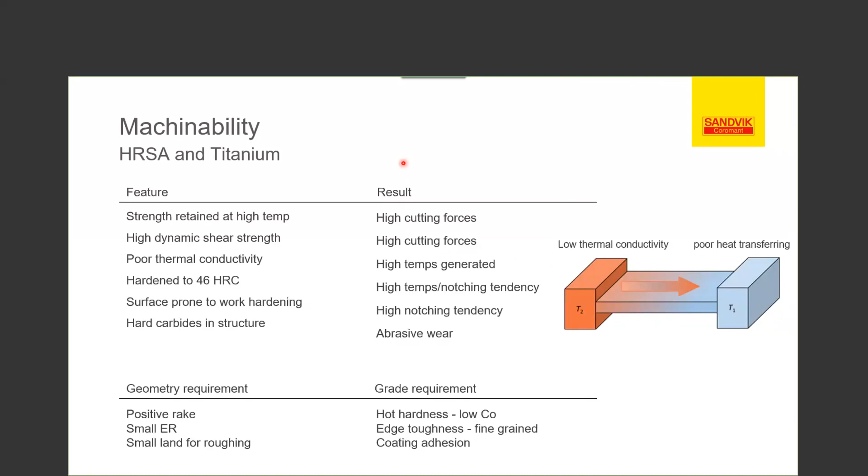The other thing we need to look at is the effects of hardness. What are those materials' hardness levels? Are they annealed, solution treated, or aged? Softer materials typically require tougher grades, whereas harder materials will require more wear-resistant grades, and you'll get more heat buildup requiring those grades.

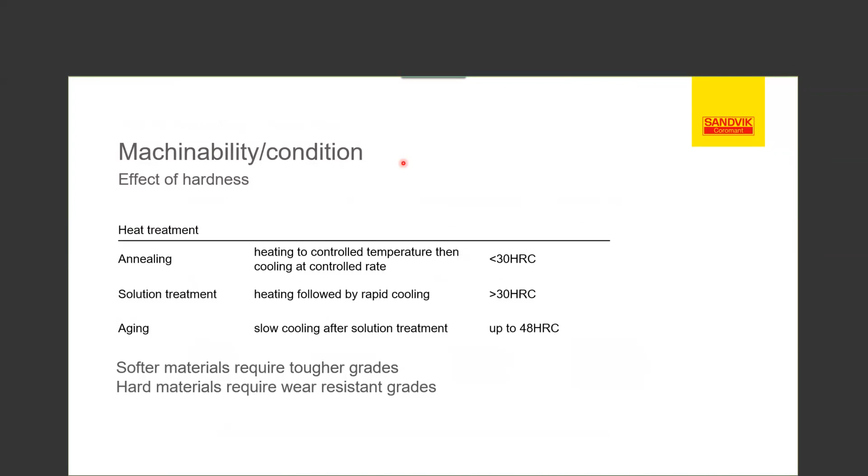When looking at the hardness of these materials, you need to take that into consideration as well, along with the different processes it goes through. For instance, if you take a piece of 718 that's annealed, basically the stress to create a chip is going to be about 900 megapascals. Whereas if you have 718 that's age hardened, same material, just different treatment, you're going to be upwards of about 1350 megapascals. That's about a 40% increase.

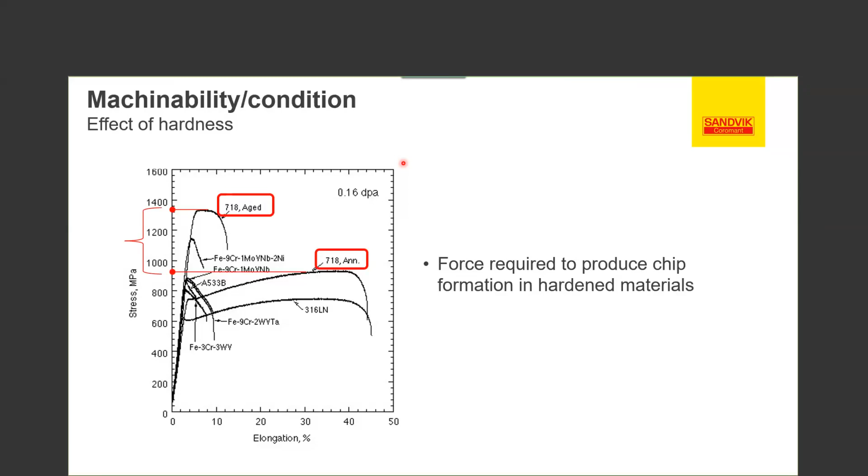So what does that mean? You're going to have to approach this material slightly differently - different techniques, different grades, different types of geometries.

When you look at the different HRSA materials, there's quite a variety out there. The focus we'll talk about today is mainly nickel-based, but keep in mind there's also iron-based and cobalt-based. Iron-based is a little bit heavier, has an iron base along with nickel, and you'll typically see them on shaft-type materials. You're starting to see a little more of the cobalt base, but cobalt is typically seen more in the medical field. So we're going to focus a bit more today on the nickel-based materials.

The most common nickel-based is 718 Inconel. We also see Waspaloy, Rene 41, and more proprietary materials like RR1000, PRM48, and ME16 type materials. Special needs are looked at when we need to machine these materials, which we'll talk about.

The next area is the titanium group. Titanium is typically about 60% the density of steel, very light, with excellent corrosion resistance. They're formed in two different areas, the alpha and beta stages, which we'll talk about. The most common one we see in the industry today is 6Al4V, and we'll base a lot of what we talk about today on that material.

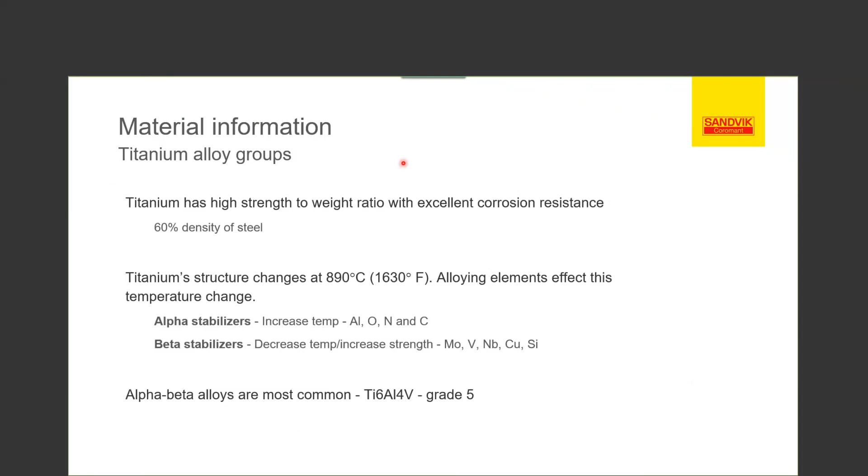When we look at the different structures, we have the alpha crystal stage, typically a lower density, lower strength material, higher creep resistance, and a bit better machinability. Then you get the beta stage: higher density, higher strength, lower creep strength, poorer machinability. And then you have the mix of the two - the alpha-beta mix, where your titanium 6Al4V sits, the very common titanium that's in the industry today.

When you look at the various types of titanium - alpha, beta, and alpha-beta mixes - you can see the speed factors to the left on the chart. The most common one, as I mentioned, is titanium 6Al4V, which I just highlighted. We like to use that as a speed factor of about 1.

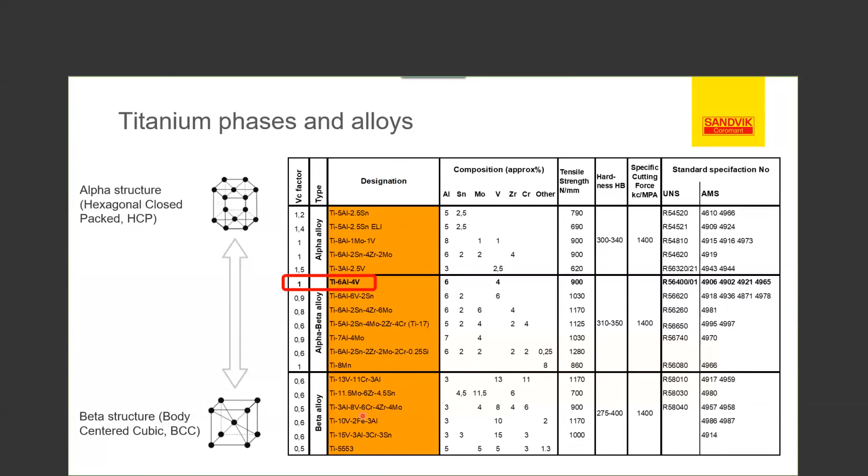What I mean by speed factor is the cutting speeds we use to machine these types of materials, whether turning, milling, or drilling. As materials go further down to the beta alloys, we need to decrease our speed. So if you're looking at a material more in line with 5553 or 1023, which is more common in structural landing gear type materials, we want to reduce our speeds. All of this is driven by the different alloying factors and crystal structures that develop in these materials.

Now that we've talked about the different materials we're looking at, next I want to talk about the process. Proper planning of your processes is important. When you're looking at a component, you want to start by analyzing the features. We don't want to go right into picking speeds, feeds, grades, and geometries. We want to look at our features, put an analysis together, and find out how we want to approach that. Put a machining strategy together, then get into picking your right cutter selection, then cutting data, and then your programming techniques. We don't want to jump right into programming techniques and speeds, feeds, and grades. You wind up creating challenges for you in the long run.

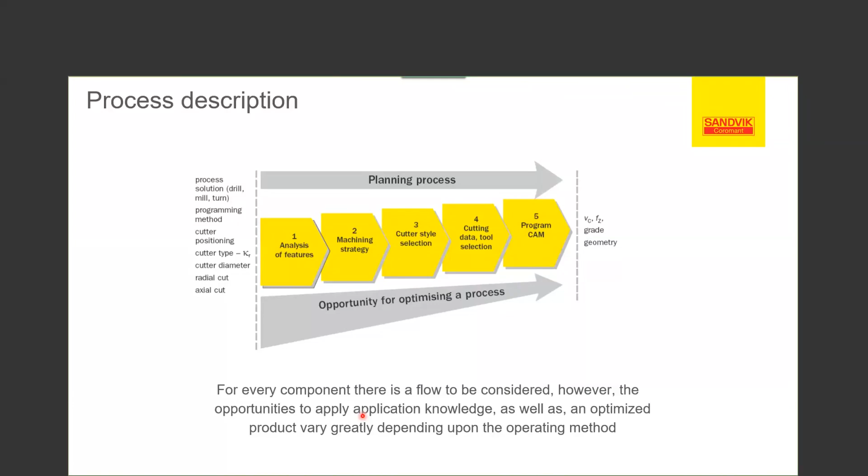It's understandable in the aerospace industry that with existing production, it's sometimes a challenge to make changes, because it's a locked process, so it's very difficult to make changes there. Then you have your partly open process, where maybe you're investing in a new machine and have an opportunity to make some changes inside the production. And of course, then you have your new production, where you're free to do pretty much what you need to do during the production phase. So find out where you are in the production phase, and then see what changes you can make and the different things you can apply as we talk today.

So typical challenges we're going to see, some of these we've already mentioned, are forged and cast skins. We're going to talk about techniques we could use to get around those. Chip control: many of these materials have challenges in breaking chip, primarily in turning and drilling applications. Chip evacuation: when you're creating pockets or deep cavities, removing chips out of there is sometimes a challenge. Short tool life: dealing with these materials, you're not going to get the tool life you typically see in machining aluminum, steels, and cast irons. So a lot of techniques need to be applied to address that for more process security.

Secure process: we're dealing with very expensive forgings and castings, so we want to have proper security when machining these components. Close tolerances and surface integrity: many times in these critical components, we need to be very careful with the tolerancing and surface integrity on these different materials. We don't want to get any work hardening. We don't want any micro cracking. We don't want any white layer inside these components. So different techniques need to be applied to help compensate for that.

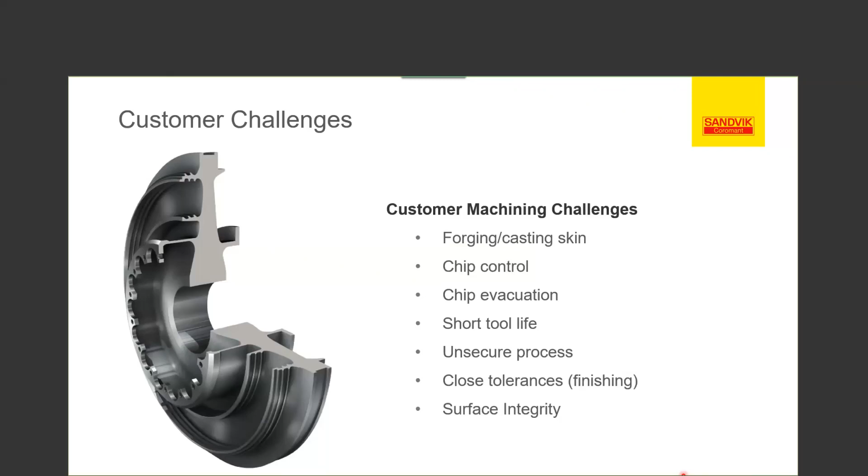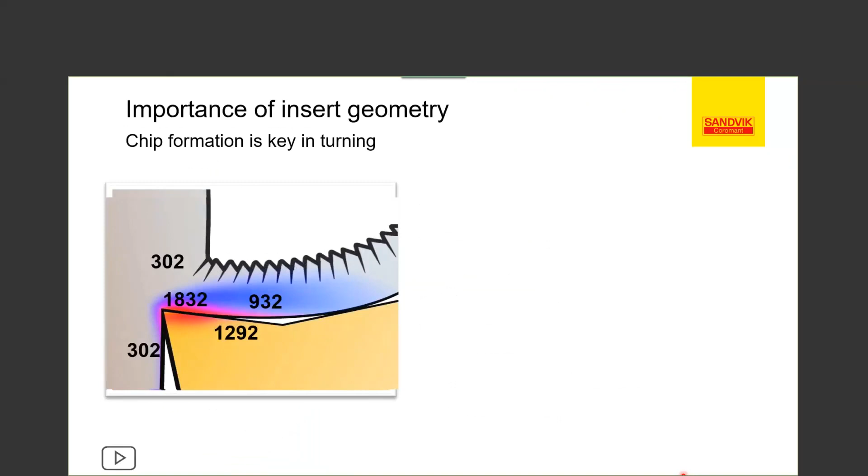Chip formation is one of the most important things when it comes to machining, particularly in turning applications. Typically in turning, when we're creating the chip, the heat goes into the chip. The challenge we have when dealing with these aerospace materials is the heat doesn't necessarily go into the chip. They are heat resistant materials, designed to resist heat. So what happens is that 80% of the heat that typically goes into our chips - if you take a piece of 4140, for instance, and you're machining it, when the chip comes off, it actually turns a blue color, because the heat is being carried away inside the chip. In these aerospace materials, that is not the case. The heat actually is increased, and about 80% of that goes into our inserts, which creates challenges.

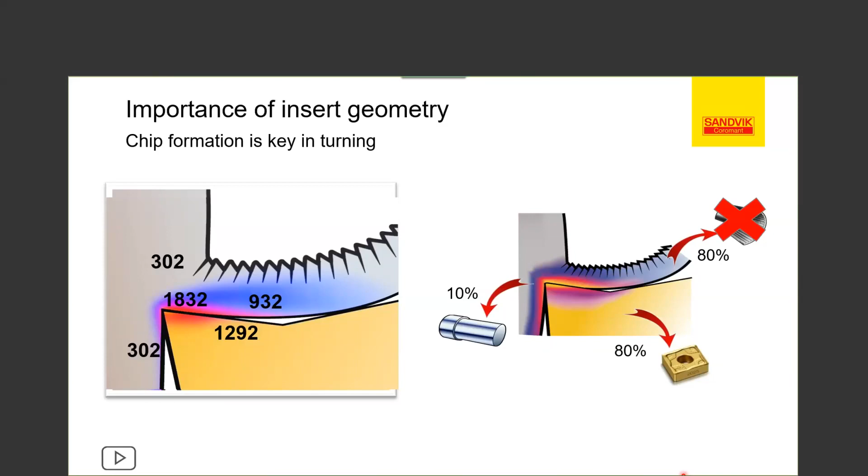What happens when you build up heat? You're going to have specialized tool wear, which we'll talk about. You could create stresses in the materials. You can create white layer. You can create work hardening of those materials. You can create micro cracking in those materials. So we want to be mindful of that. Again, sharper is better.

Again, look at this picture up top here, looking at the sharper geometry. Sometimes we can get away with using positive geometry, but sometimes we still need to use a negative geometry. Be sure we're using something that has a sharper tendency or a periphery ground. They will perform much better in these types of materials.

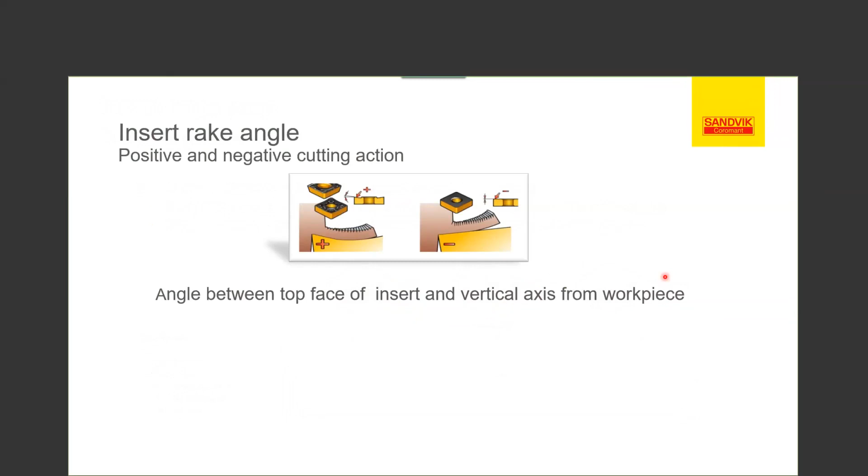If you can see from the illustration here, when we're pushing that chip, we're getting a nice shear, as opposed to when we're using a negative insert, it's actually plowing that material. Again, in this area here, on the negative insert, you're given the opportunity to create heat, which is something we do not want to do in heat resistant materials.

Again, the heat will go back into your chip. Actually, it does not go back to your chip. It goes into your insert and will create a great amount of challenges for you on your component and/or your insert, which will affect your process security.

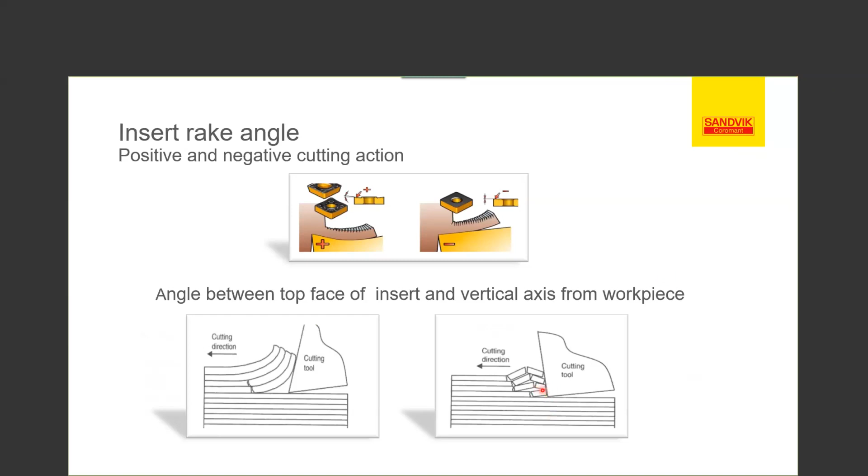In the milling operations, we want to try to add as many teeth as possible to be more productive, as opposed to turning, which of course is just a single insert. So we want to try to keep our engagements a little bit on the light side and keep our speeds on the lower side as best we can.

Next, we want to look at the tool wear. What type of typical tool wear do we get when we're machining these types of material? Frankly, the most common is going to be our notch wear. It's typical on the depth of cut we're running our insert.

So what happens is you get a little heat propagation area right here, and what happens is you get that buildup of heat right there, and that's what creates the notch. Eventually, that notch will turn into a whole edge line breakage. So we'll talk about techniques later on which could help avoid this.

Some things we can do, of course, is we can change the type of inserts. We'll go into a little more detail later on. Maybe a round style insert, we can change our lead angle. When we look at an insert, for instance, that comes in on more of a 90 or 95 degree angle, what happens is we have a lot of heat buildup, and we'll go into more detail with this later on. We want to try to avoid that as much as we can.

We can try to keep it below the nose radius of our insert, which essentially gives us something similar to a round insert or a button type of insert. We want to try to use more of a positive reinforced geometry, something sharper, again with less tendency to build up that heat as opposed to the negative inserts.

And we'll see this more in harder materials, of course, because being harder, they're going to generate more heat while we're trying to machine them in the operations. Also the material conditions will be a factor as well. The forged and cast are typically a little more on the abrasive side. Hence, you'll see a little bit more of a wear mechanism creating more heat. So this could be an issue for you as well.

The other thing to look at is go to actually a thinner grade, something along the lines of a PVD type grade as opposed to a CVD grade. What happens is, with the thinner coating, it therefore has a better shear tendency and a sharper edge line.

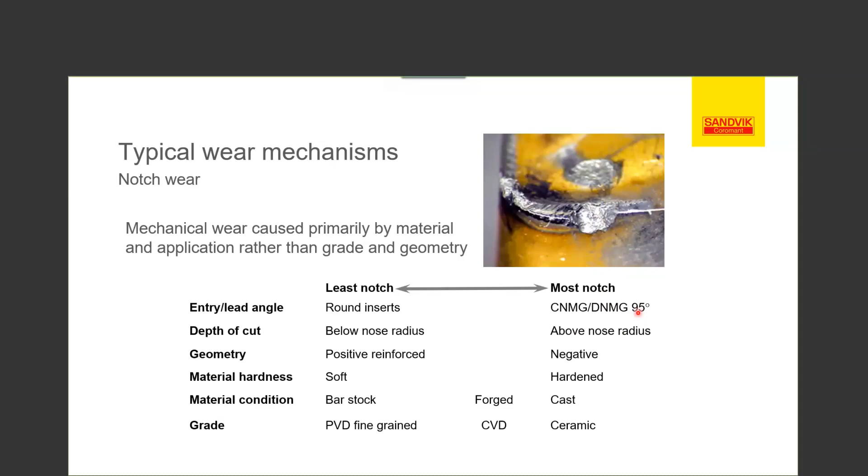The other type of wear mechanism you're going to see quite often is going to be your plastic deformation. Essentially what happens is you're heating up that insert to a point where the insert is actually starting to melt. In this case, you can get an impression or a depression. A depression is more something that's hitting it, whereas an impression you might see maybe in a grooving type insert where it's actually pushing into the insert and creating an impression of the insert.

Here we might want to look at something more of a wear resistant grade, a harder grade. You want to reduce your cutting speeds. Again, use that more positive geometry to create a shear effect, or decrease your feeds, because the feed sometimes adds a lot of heat as you're shearing the material. So be cautious with this.

The other thing is sometimes you get these types of wear mechanisms, but we don't stop the insert early enough. So essentially what happens is you'll get a whole edge line break. And what you think might be happening is, oh, I'm just losing my edge because it's not tough enough, and then you'll change it to a tougher insert. The fact is you should actually go to a more wear resistant or harder insert.

To compensate for this plastic deformation, what we want to do is make sure we're stopping our insert before they get to the final failure, so you can read the wear properly and make the proper adjustments.

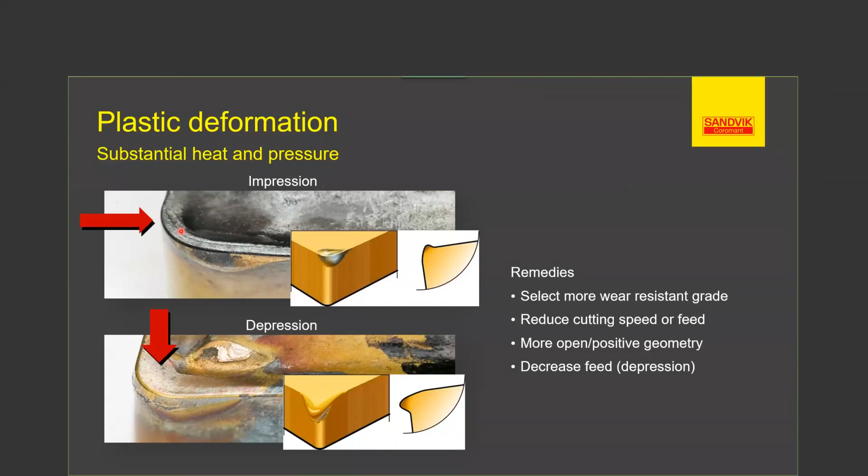So when you're dealing with these materials, one of the things we do is we want to run copious amounts of coolant. High pressure is better, which we'll talk about later. And the reason for that is to try to evacuate that heat as best we can.

The challenge we have when we're doing milling operations, as I mentioned, it's cyclical. It's in and out of cut, in cut, out of cut, in cut, out of cut. And what we're doing is actually we're shocking the insert with that coolant. So it's almost like taking an ice cube and throwing it into a warm glass of coffee or tea and watching it shatter. The same thing is happening to your inserts.

And again, sometimes what happens is we push the inserts to failure, and what happens is we have a whole edge line that is actually gone, and we think we might have microchipping, or we think we might have edge line failure. The fact is, what's happened is we're actually getting thermal cracking or comb cracking. So again, we need to stop the inserts prior to complete failure, read the wear, and make the adjustments accordingly.

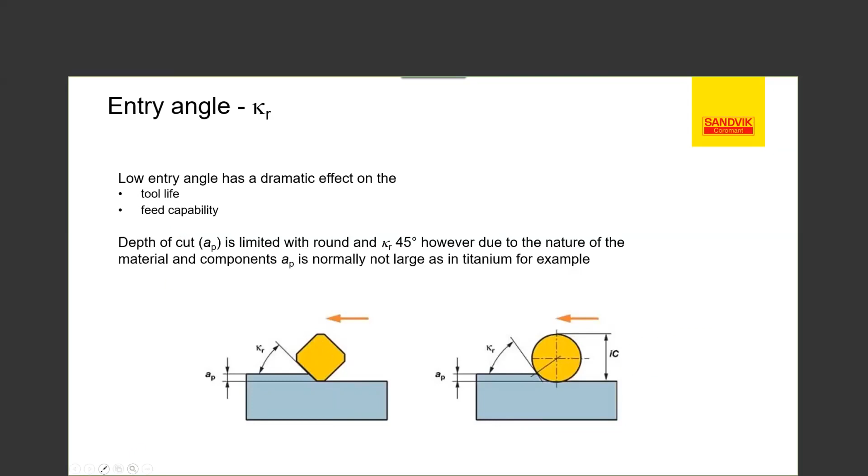So some of the things we could do to help compensate the challenges we have with some of these wear mechanisms is we can change our entry angles. Sometimes the feature we need to machine is conducive to what we need to do, i.e. if we're going against a shoulder, we're going to need a square shoulder type of insert. But one of the things we can do to try to compensate some of the challenges we're going to have is change the entry angle of your inserts to try to thin out those chips. And we'll go into that in more detail.

There's a gamut of styles of inserts out there to choose from, and each one of them has their need. Anywhere from, we mentioned, a 90 to a 95, typical on a square shoulder mill cutter, or a C or a DNMG style insert for going up a wall. Just be mindful when you're running these, we're going to be more prone to notching type operations.

As we put more of an angle on the insert, to 75, 60, down to a 45, you'll notice we're actually thinning those chips and we're elongating the contact area. What that does is dissipate the heat over a longer area, and we'll get into that a little bit further. So one of the best ways to look at dissipating the heat is ideally about a 45-degree entry angle, or a button cutter with a depth of cut that's similar to a 45-degree entry.

But as we tilt those inserts, you can actually see we elongate that area. So the heat actually is over a larger area, which in essence gives you an area where we can dissipate the heat a little bit easier, relatively speaking.

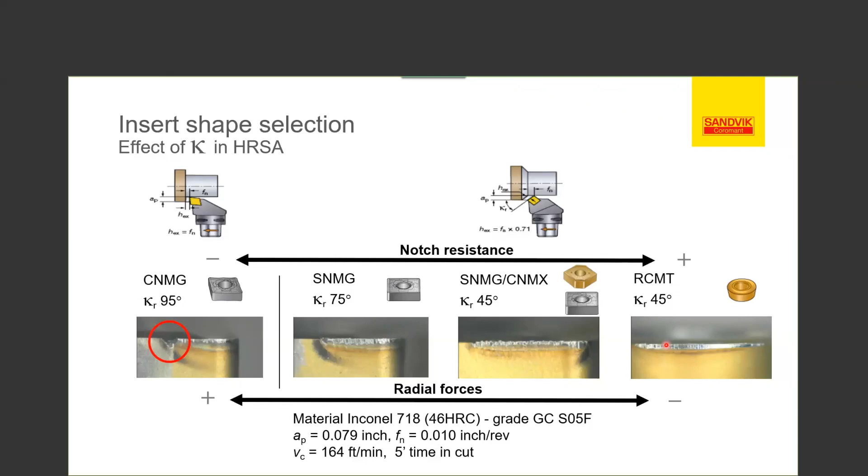Here's another nice picturation of the different inserts. Again you can see the CNMG up at the top with the notch wear, a 45-degree angle, and again a button insert. The thing I want to take note of is we talked earlier about the chip thinning, which we'll go over in a little more detail in a moment. But you can see it from the cutting data: we're running essentially all the same surface footage, basically the same feed, but we're compensating with the chip thinning effect.

You can see here on the CNMG, we're running a 10 thou feed. When we're looking at tilting the insert, like a CNMX here on a 45, we've actually increased that by a percentage of about 40%. So we're actually increasing our feed, increasing our productivity based on the chip thinning. And you can see here on the button cutter, we increased it substantially more, up to 20 thou. The insert is still seeing the same amount of chip thickness, but because of the chip thinning, we're actually gaining that productivity, so we're not underfeeding.

And you can see here what happens is we're going from a cubic metal removal rate of about 7 inches on a CNMG to a button or 45-degree entry insert at 13. So we're almost doubling our productivity. And it took us 5 minutes to do this, as opposed to 4 minutes to double our productivity. So please keep that in mind. Anytime you're using these inserts, we need to take serious consideration of the chip thinning effect, but look at the amount of productivity you're gaining and also process security.

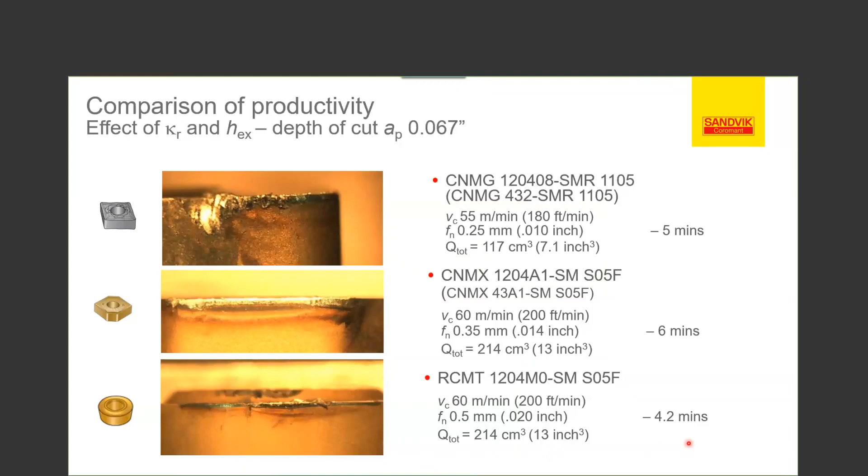So when we look at the chip thinning effect, we'll look at this for round inserts. You can see here, if we were to change our entry angle based on our depth of cut - the example we're going to show, if we took the ICD insert and took about 15% of the IC of the insert, our entry angle is going to be around 45 degrees, which is very similar to a 45-degree SNMG style insert.

So our feed modification factor is going to be about plus 40%, about 1.4. So what does that mean? If I'm feeding this insert and I want to see a chip thickness of about 4 thou, I need to increase my feed rate to be able to see that 4 thou chip thickness. So we need to increase our feed up to 6 thou. If I'm going to run a chip thickness of 14 thou, I would need to change my feed to 20 thou, for that chip thinning effect.

Again, if we don't do this, what's going to happen is we're going to underfeed those inserts, and we're actually going to push the chips, creating heat. This is something we desperately want to avoid. If you don't do that, you're being detrimental to yourself, not only creating heat and unstable operations, but you're leaving productivity on the table. Most ideally is about a 45-degree entry angle. So if you're going to use an insert on a button cutter, a good rule of thumb is to be about 15% of the IC of the insert, which will give you that around a 45-degree entry angle.

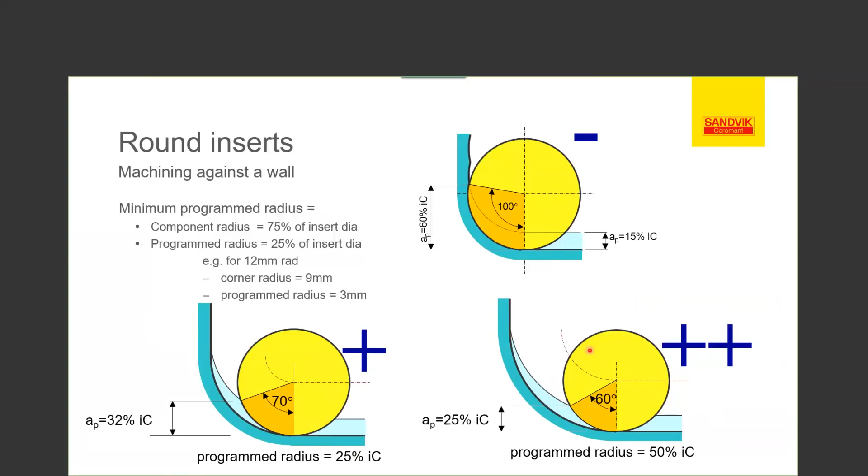Other techniques we can do include different types of dynamic or trochoidal techniques. It's nice today because a lot of the CAM software packages offer these solutions for us. Whether it's dynamic, adaptive, or waveform, everyone in the market today has something, so it makes it much easier for programmers in the industry. Instead of plowing straight down into the walls and going across, we do these nice radial sweeps in and out. The other nice thing is you can go across in one direction on a round insert and back the other direction with the insert.

What's nice is you're essentially cutting on one side of the insert and then the other side. So one side of the insert gets time to cool as the other insert is in engagement, and then vice versa. That helps with the heat propagation issue we saw earlier on those 90 degree style inserts.

Other techniques we could use, not as beneficial as this sweeping technique, are ramping techniques. We can also add an arc to these ramping techniques if need be. The idea is we're changing our depth of cut as we approach the cut. The challenge is your arc of engagement changes as you plunge into the component, so your feed needs to be adjusted as you go into your feature. Just be mindful of that. Dynamic, adaptive types of techniques work extremely well for these types of features.

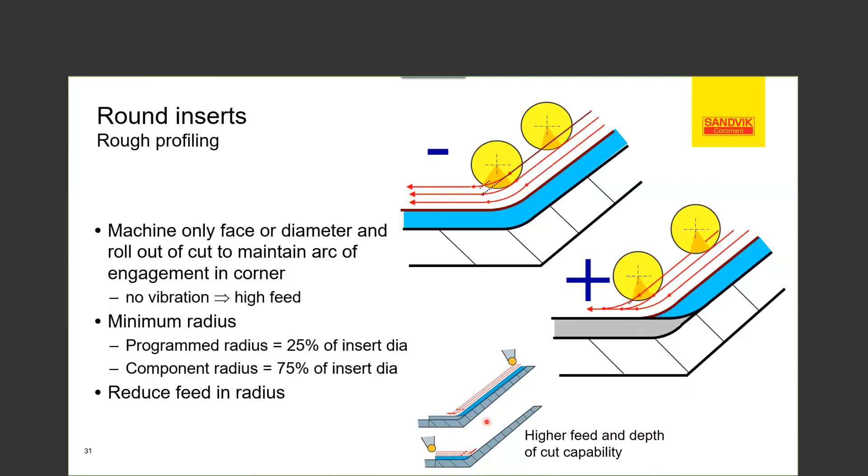Next, I want to talk a little bit about coolant. These materials have a great amount of challenges with breaking chips, so one thing we want to talk about is using high pressure. Using high pressure actually creates a hydraulic wedge between your insert and the chip, helping force it to break.

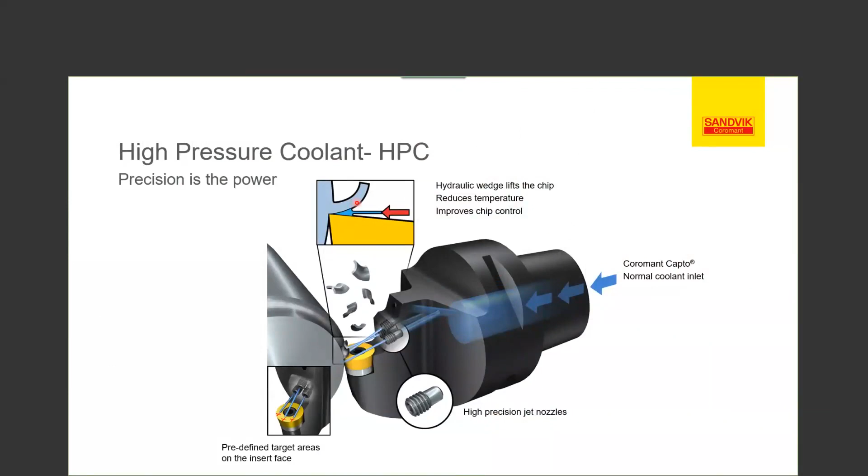Many of you have machined nickel-based materials and titaniums, and know the challenges when turning these materials. You can see from the different chip charts here, comparing a non-high pressure tool with a high pressure tool, using standard or low pressure versus high pressure. The material here is titanium 6Al4V, and you can see the types of chips you get using standard pressure as opposed to high pressure.

If you're having trouble with bird's nests and things of that nature in titanium, using high pressure upwards of about 80 to 100 bar will work wonders. It works better with titanium than nickel materials, but it still helps with nickel materials. You can see an example too, utilizing normal pressure and then increasing to about 80 bar, about 1100 PSI—you can see the difference in tool life.

You've got heat built up in the cutting zone, and that pressure helps bend the chip back off the insert slightly, cooling down that zone. With normal pressure, after 10 minutes and after 20 minutes, you can see a tremendous amount of notch and a lot of thermal activity. Here, same insert, same cutting parameters, all we've done is increase our pressure—you can see up to about 40 minutes of tool life, and we're just starting to see a notch build up. The only thing changed here is the coolant pressure.

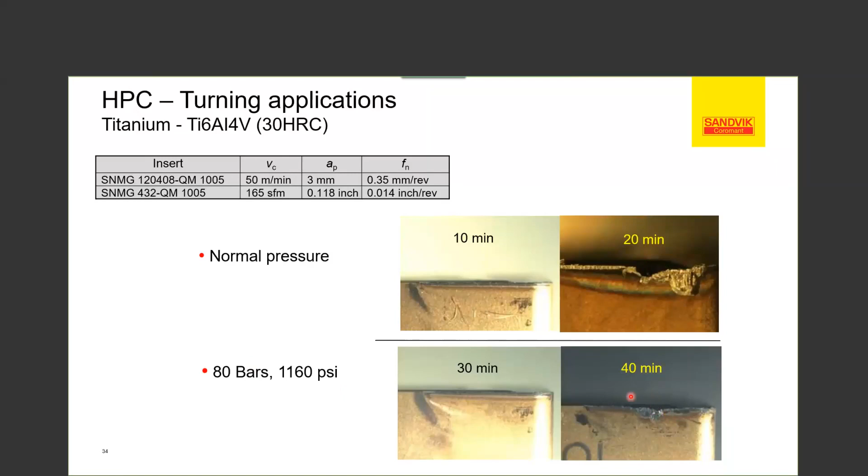In this other chart, you can see the different depths of cut we've applied. The bottom of these charts shows normal pressure as opposed to the high pressure on top. One thing I recommend: use these chip charts to find out optimally where your sweet spot is in your material—how it's going to function on your machine with the different materials you have. Come up with a chip chart, circle that best area for your shop and application, and stick to it. And of course, utilize the high pressure coolant.

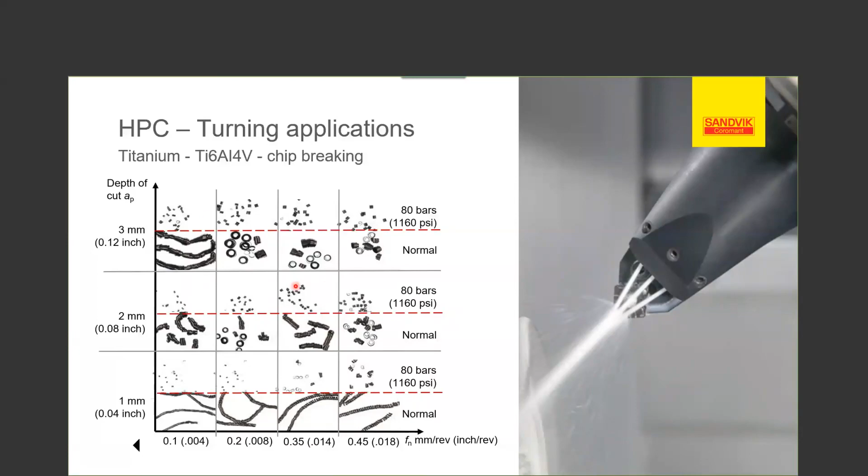The other thing I want to mention is when cutting titanium, please always use coolant. You do not want to machine titanium dry—it'll create what we call an exothermic reaction and a potential fire that's very difficult to put out. So I just want to urge everyone to be mindful of that.

Next, I'd like to discuss the different types of machining strategy.

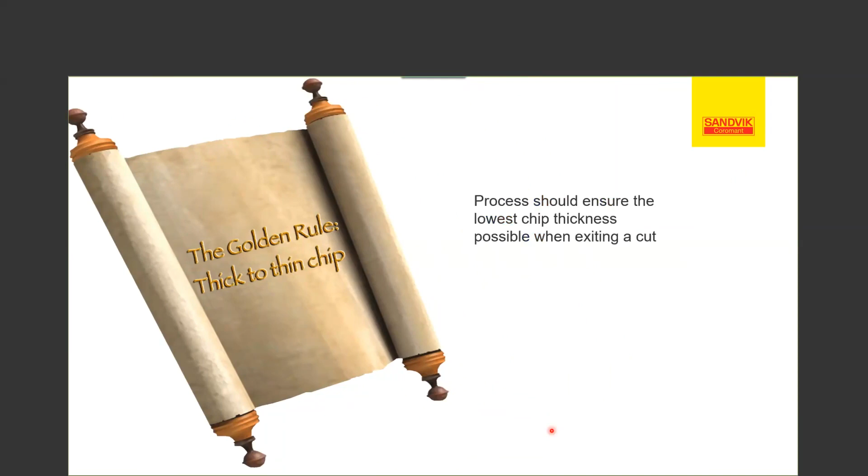So what actually happens is the milling cutter orientation gives us that chip thickness. Whenever you're doing a full slot operation, we get a thin to thin chip. This is one of the most challenging applications when it comes to milling, especially in these heat resistant materials. We're having a thin chip on entry, building up a chip, then thin chip on exit. What happens is we're not actually creating a chip here yet - we're actually rubbing that insert as it progresses in.

The other challenge we have is if we do 50% of the cutter, what happens is we're actually taking an insert and slapping it against the side at the full chip thickness, which creates challenges. What we want to do is keep our cutter engaged at around 70%, or less than 50%.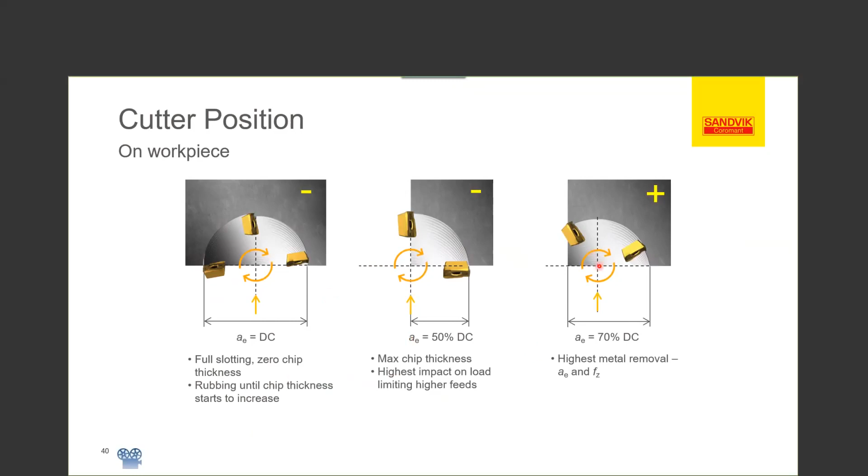So if you look at our animation here, you can see what happens. In the cut here, we're actually building up our heat as we're progressing in the cut.

What we want to do is shift our cutter to about a 75%, 70% engagement. What happens is we get about 60 to 70% of the chip thickness. We're easing into the cut, and we're creating a chip - we're not actually rubbing the chip as it gets engaged.

We want to make sure we offset in the right direction. If we offset in the wrong direction, we're being counterproductive - we're actually thin to thick, which means we're rubbing and then exiting on that thick chip, which we don't want to do.

The other thing we want to try to do is always down mill or climb mill when machining these materials. We want to create that chip. If we do an up or conventional mill, we're actually rubbing the chip as we start to engage, then creating that thick chip on exit, which will create failures and challenges for us.

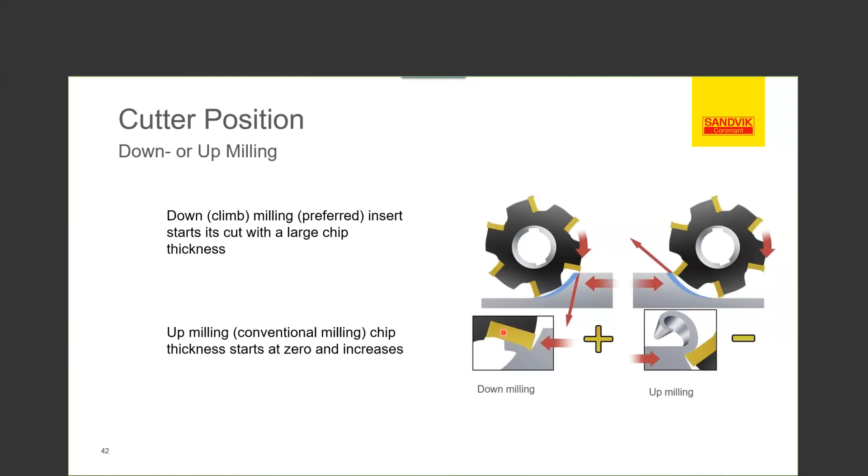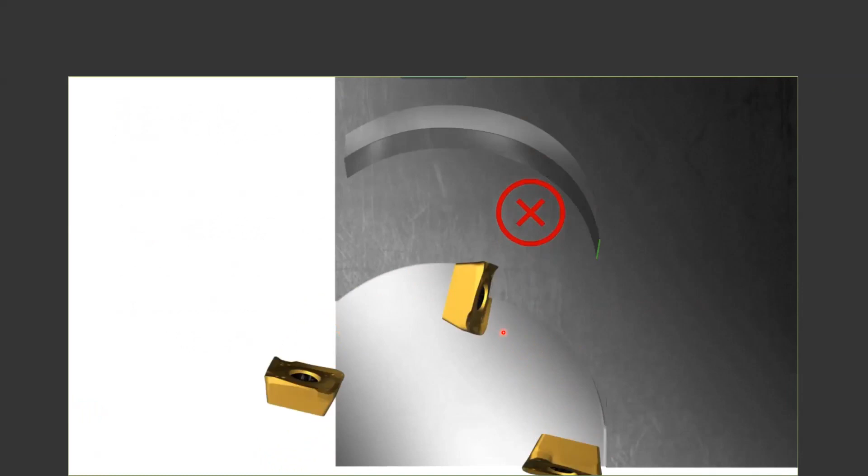One of the things we want to do is try to roll the cutter into the cut as we enter a component. This gives us a nice smooth entry. You can see here, as we enter a component, we get that thin to thick chip until we start to get engaged, which we don't want to do. That creates a lot of challenges - a lot of times you'll hear the cutter make that pounding noise as you're getting into the cut.

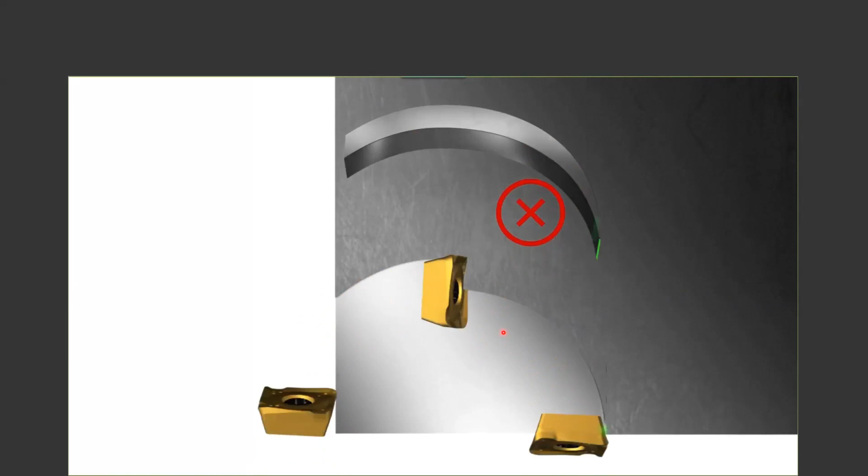You can ideally reduce your feed as you enter the component, which can work, but what we recommend is actually rolling the cutter into the cut. This creates that thick to thin chip - a very stable operation. You do not need to reduce your feeds as you enter the component. It's a much more secure process.

As you can see from the animation, we want to be careful not to roll in the wrong direction. What'll happen is you'll get that thin to thick chip like we talked about earlier, and it'll create challenges for us.

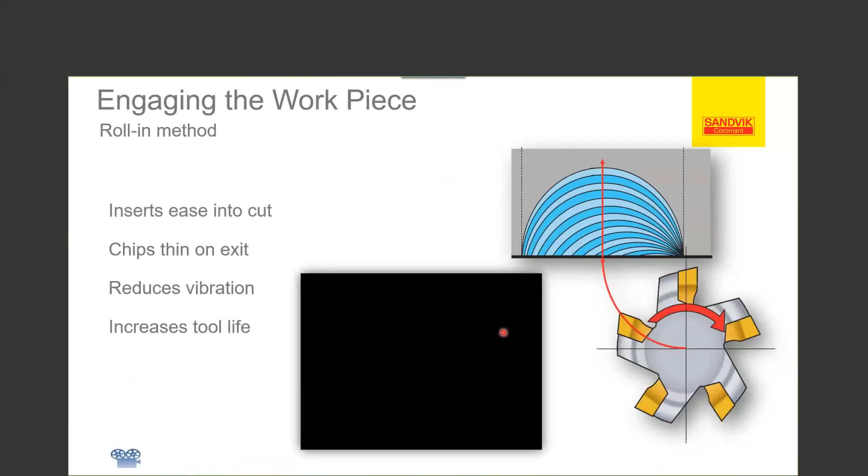See it here from the animation. Inserts ease into cut, we get our chip thinning effect, reduce our vibration, much better predictability, much better tool life.

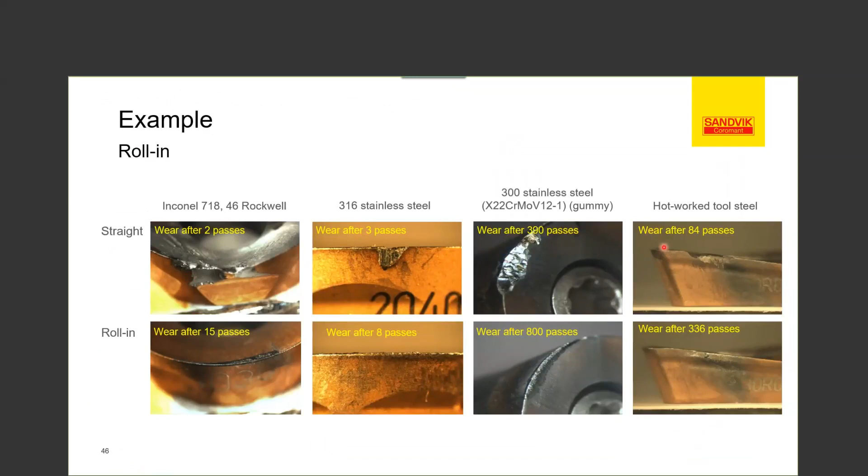Again, this will be a lot less vibration. It gives you that thick to thin chip on entry, a little bit easier to program. And again, if there's maybe a fixture or a feature you can't obtain with the roll-in technique, this is another way to go about it. If you can't, we recommend reducing feed as you enter the component, and then once fully engaged, you can increase your feed.

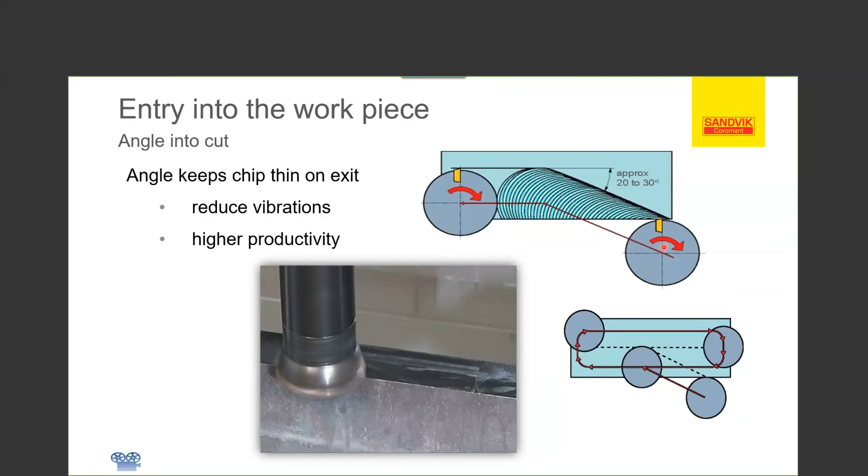Hey Bill, this is Chris. Yes, Chris.

We've got a few questions from the audience. I think some are a little bit more general in nature, and we can move those towards the end if there is time. And then I think a more specific question came up that might be worth addressing now.

One of the participants had asked, what is a good rule of thumb for roll-in arc radius to cutter radius ratio? Essentially what you do is take the radius of the cutter, multiply it by 2 as your radius, add your offset from the component to that radius, and that will be your roll-in. So again, it's 2 times the radius of the cutter. Whatever your offset is, 100 thou, 80 thou, 50 thou, whatever it is, add that in there, and that will be your arc of engagement for your roll-in.

Just go back to that animation. Okay, so thank you for that question.

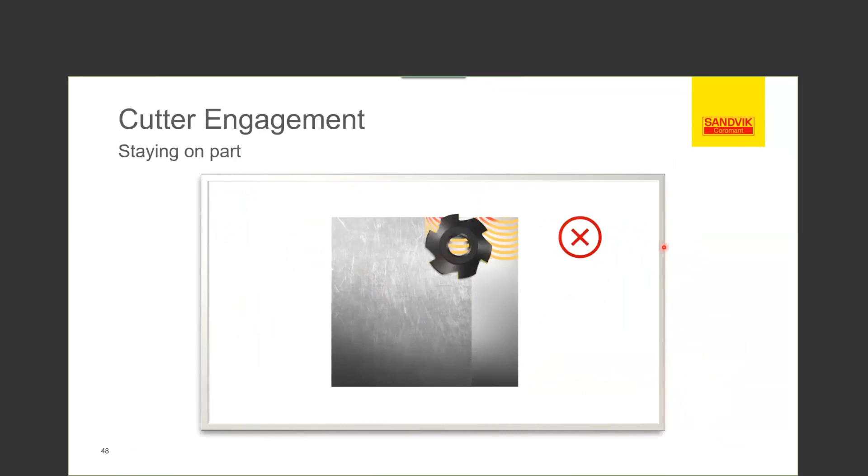The other thing we want to be mindful of is keeping the cutters engaged at all times. You can see here from the animation, as that cutter goes in and out of cut, every time we enter that component we're creating an area prone for vibration, that thick to thin chip we talked about. We want to try to keep our cutters engaged at all times.

One of the things we want to be mindful of too is every time we change direction with our milling cutter, we want to create that arc similar to what we did with the roll-in technique. The reason is we're going to get that chip effect, that thick to thin chip, as we talked about earlier.

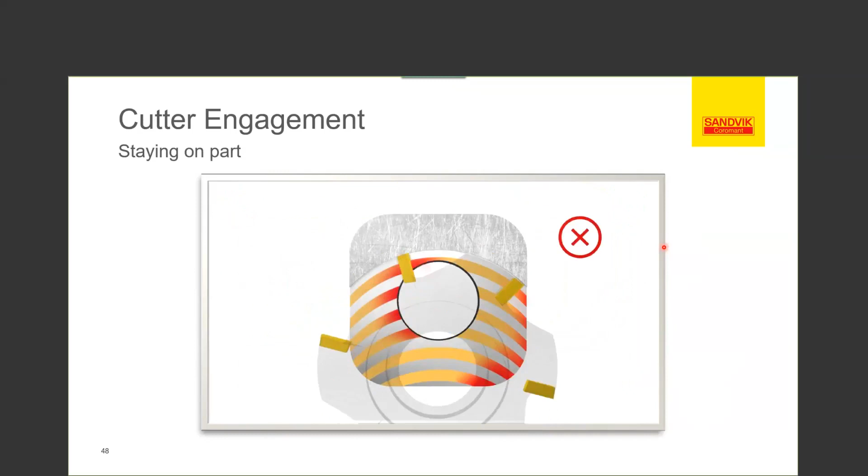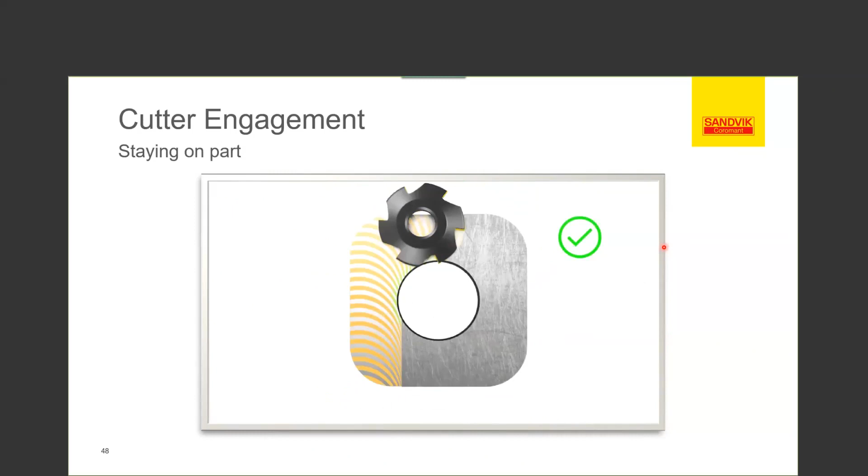The other thing we want to be mindful of is interruptions in the components. There are always holes and features in the different components we need to machine. So we want to try to roll around them as best we can and program around them, again using the roll techniques to go around those.

Again, when we change direction, anytime we do sharp angles and changes in direction inside the component itself, we're going to get that thick to thick chip. Making that arc in there, we'll get that thick to thin chip, and it'll be a lot better process security. It'll sound better, and you'll get a lot better tool life.

Staying on the component is very important as well. Every time we exit off the part and come back on, we're not making chips or being productive. Every time we come off and on and re-engage the component, we give ourselves an area where we can have challenges with chip formation, cutter engagement, as well as areas where we could have chipping of the inserts. So we want to be very careful of that.

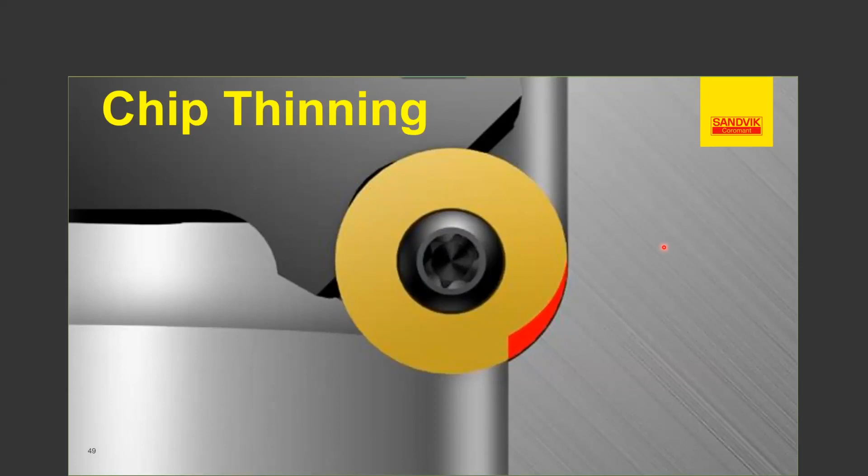Next, I want to talk a little more in depth about chip thinning. We touched on it with turning, now I want to talk a bit more about it when it comes to milling operations.

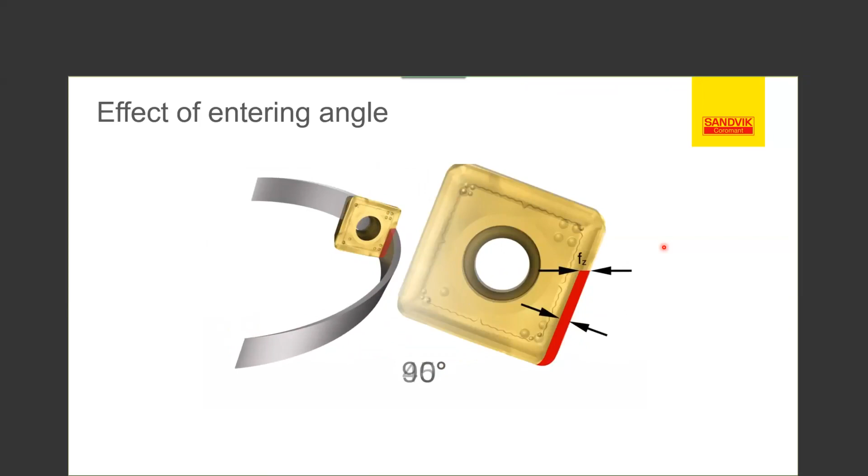The entry angle of a milling cutter: looking at a 90-degree, your chip thickness and your feed are essentially the same. As we tilt that insert, like we said in turning, we again have a chip thinning effect, and what we need to do is increase our feed to maintain that proper chip thickness.

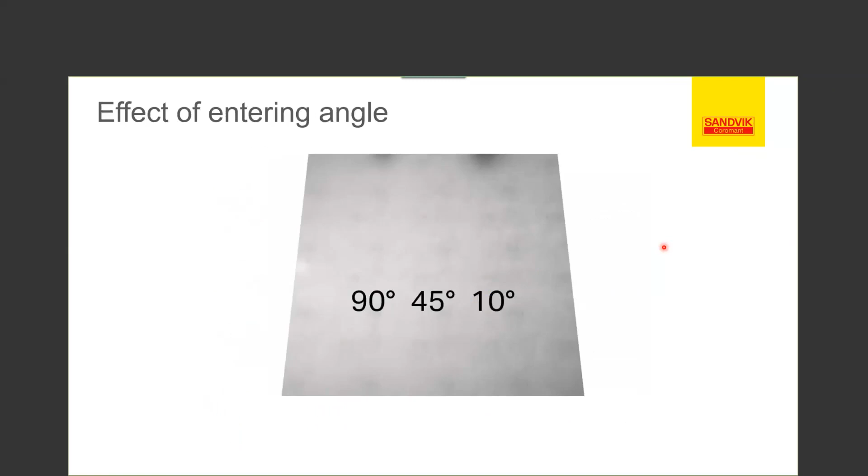So if you take a 90-degree, a 45-degree, and a high feed cutter and run them side by side, essentially what happens is we're going to get a chip thinning effect. So what happens is we need to increase our feed in order to maintain the proper chip thickness. If you take a 90-degree cutter, for instance, your chip thickness and your feed are identical. You have a factor of 1.

As we stated earlier, when it comes to a 45-degree, we actually have a 40% increase in productivity. So we need to increase that by a factor of 40%, or multiply our chip thickness by 1.4, which would be our feed per tooth.

Now with round inserts, as we talked earlier, it all depends, and we'll talk about that in a moment. When it comes to, for instance, a high feed with something on a 10-degree angle, we can actually feed that on a factor of almost 6 times. I'll actually show you how to come up with that calculation.

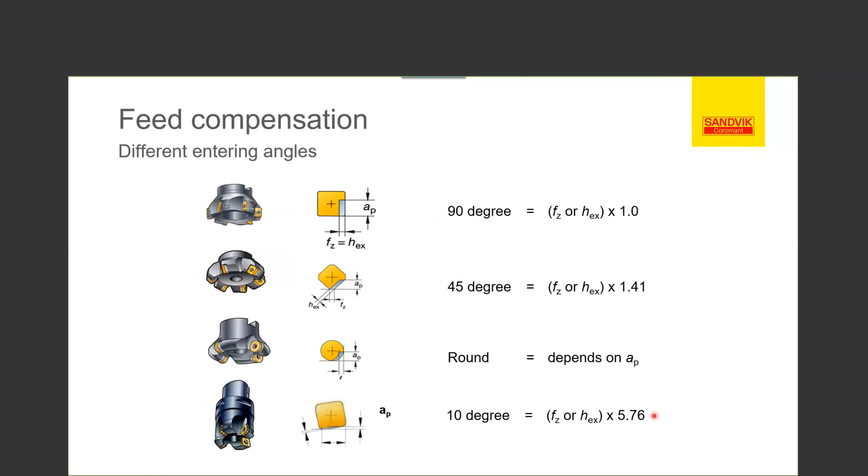However, when it comes to buttons, we need to be mindful that the depth of cut is going to determine what our chip thickness is going to be and how we want to address that. So when we look at buttons, for instance, the depth of cut is going to be the driver of how we need to increase our feed.

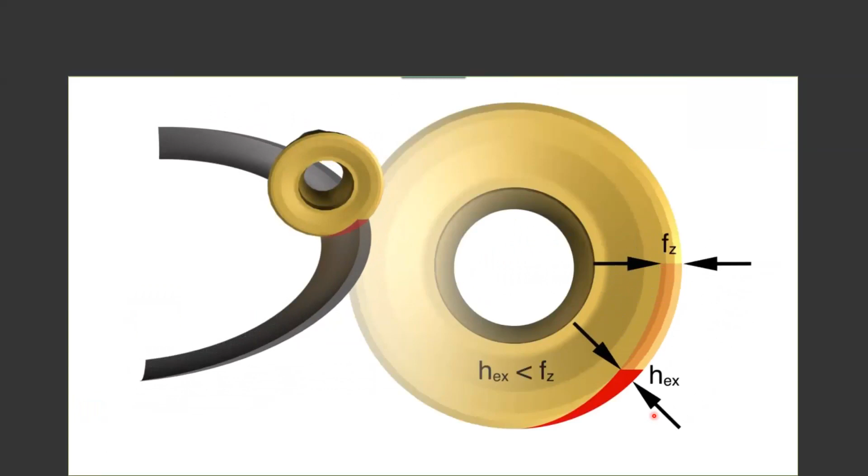As we lower our depth of cut, the radial engagement on that insert decreases. Therefore we can almost run those button cutters as we would a high feed cutter. We can increase our feed per tooth, almost running it like a high feed as opposed to burying a cutter on a larger depth of cut. If we don't do that, we will have a tendency to underfeed and create that wear again and that pushing of the chip.

So how do we calculate that? It's very simple: we basically take the sine of the angle of the insert, take its reciprocal, and that will be our feed modification factor. So if you have a high feed cutter with a 15-degree entry angle, for instance, we take the sine of 15, which is 0.2588, and take its reciprocal. Your feed modification factor will be 3.86.

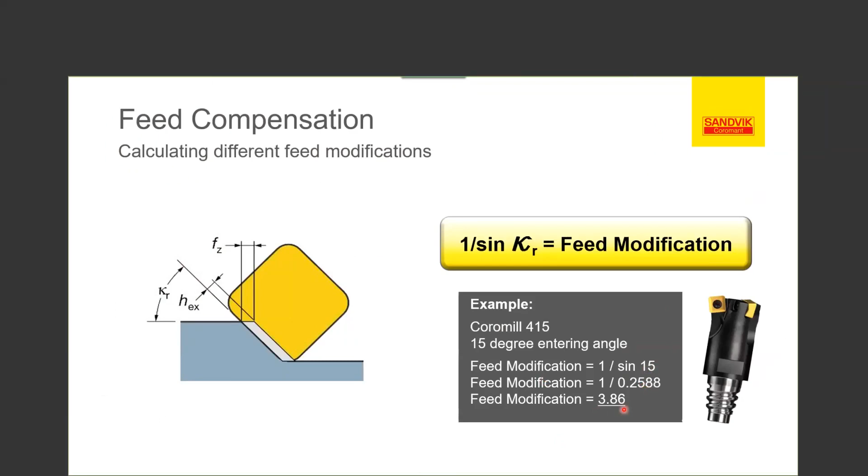Another thing to take into consideration is your radial engagement of your tool. You also have a chip thinning effect with your radial engagement, and you need to be mindful of that. Just like your insert engagement, your cutter engagement is also important to notice, because you can actually underfeed your cutter as well.

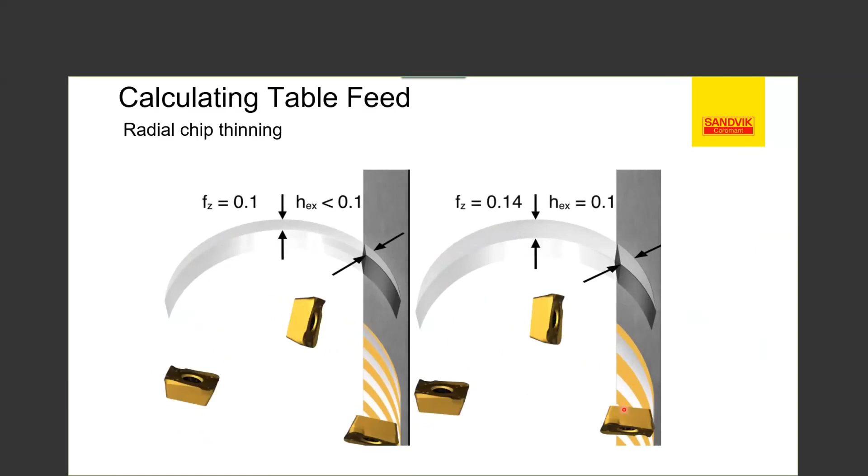If you have anything less than half the diameter of the cutter itself, you can actually increase your feed on your tool to maintain that chip thickness.

Now, one of the things you need to be mindful of is if you have something with an entry angle as well as a small radial immersion of the cutter, it's a twofold effect. Not only can you add the factor of a feed modification factor for your insert, you can also do it for the radial engagement. This is something that's very often missed and very important, so you do not underfeed those inserts. Be mindful: you have two feed multiplication factors there, the insert entry angle as well as your cutter immersion.

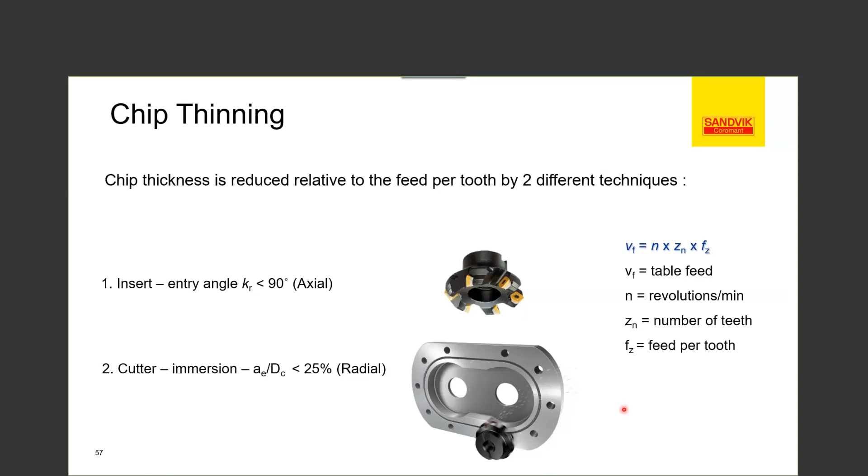Next topic I want to talk about, which is pretty common in titanium machining when it comes to the airframe industry, is high feed side milling. We touched on it on the last slide regarding radial immersion of your cutters. This is essentially about light radial engagements.

The idea is typically you'll see this on long edge cutters, but you could also see it on solid round tools. Essentially you want to try to reduce this arc of engagement. This is an area where you have a lot of heat buildup in the cutting zone with these types of materials, which we've learned is not good, so we want to make that area a lot less.

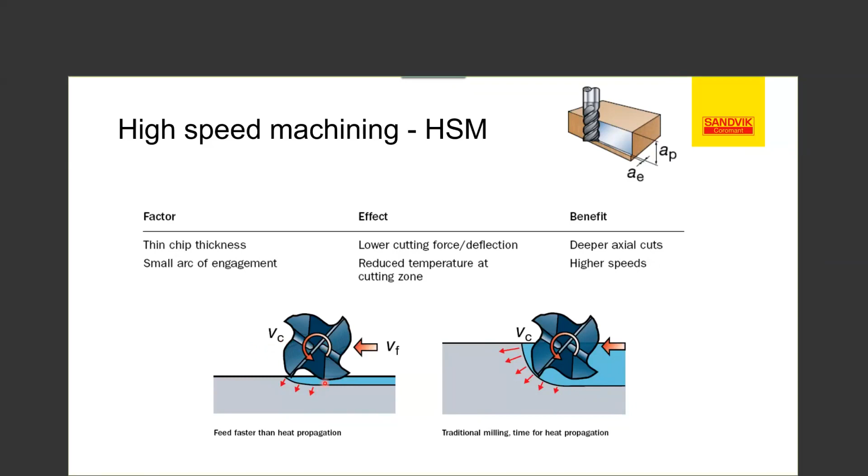So you have your high feed capabilities because of your arc of engagement. You have a less area for heat propagation. That's the idea with this.

Just like I mentioned on the last slide, anytime you're looking at something with full arc of engagement, you have a lot of heat buildup. These are heat resistant materials. On the lower radial engagements, we have less tendency for that heat propagation area, so it's better for the inserts, a more secure process. This is going to be an ugly situation as opposed to this.

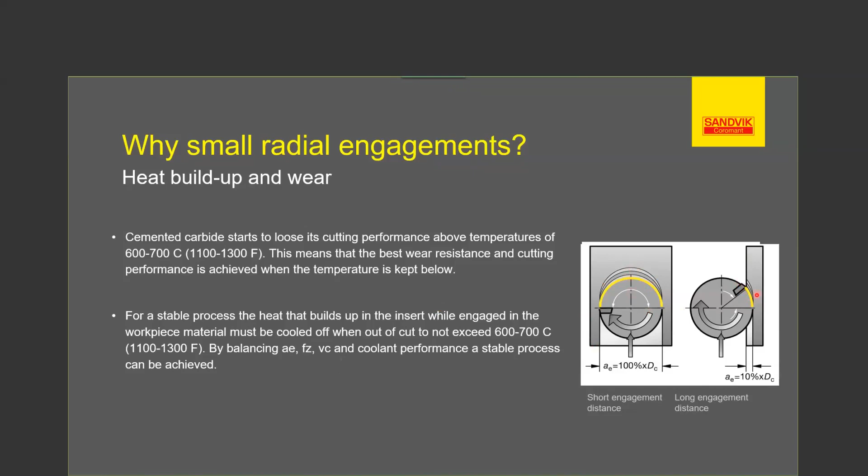If we can keep a continuous low radial arc of engagement in a spiral morph kind of application, you have a lot better process security and predictability. Here's some actual science behind it.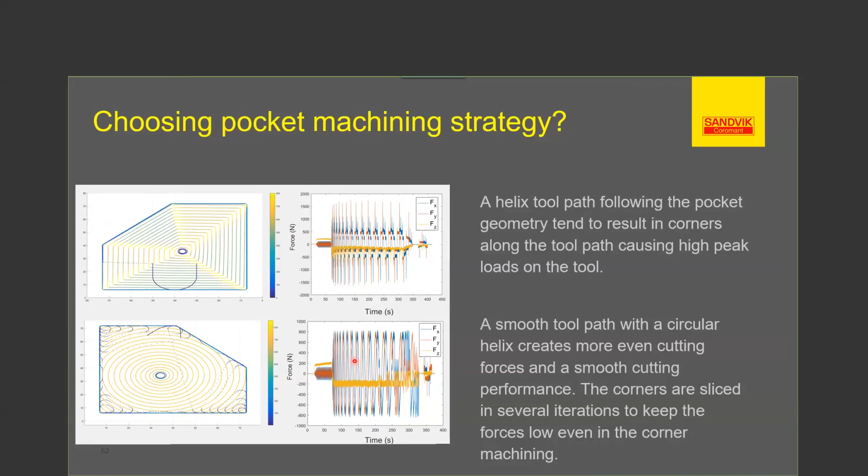Some things we can do if we're handcuffed into doing this: just like the inserts we saw in turning, we need to optimize with the different types of radial engagements in the corners. Ideally you want something about 25% of the diameter of the cutter, but better yet we can reduce that with a 50% reduction, which gives you a lot better predictable tool life.

We just want to be mindful of the feed changes in the corner. Every time we hit the corner, because of this arc of engagement, we need to reduce our feeds in the corners to compensate. That's why many times that spiral morph we just saw is a lot better.

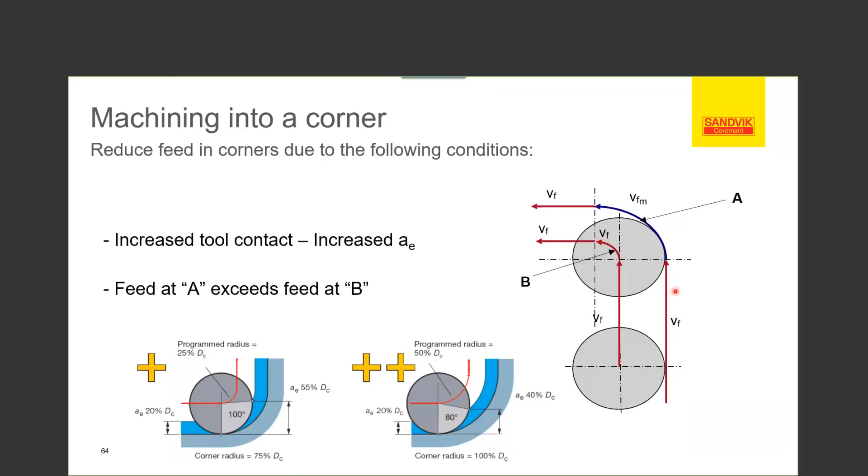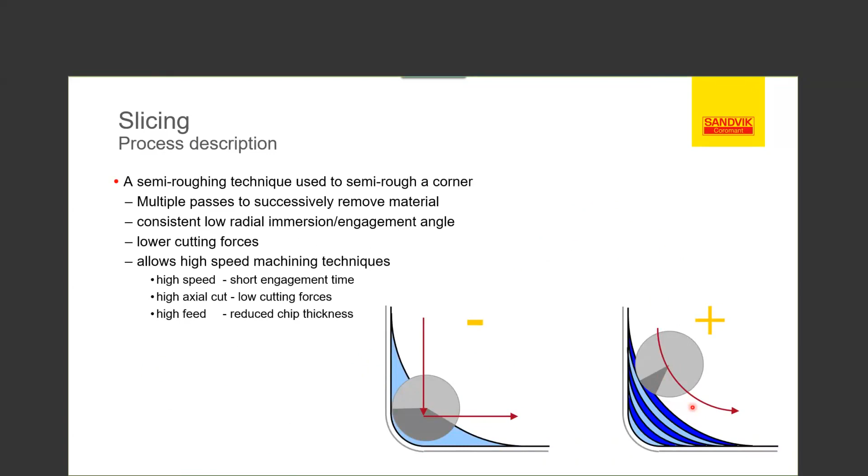Now if you need to do corners, which we have to, one technique we can utilize is a slicing technique, where instead of driving the corners and creating a large radial engagement, we create a slicing technique, minimizing our engagement as we continue into the corner, optimized with the diameter of the cutter. As you go into the corner, you get a lot better process security. It takes a little bit more time, but you'll get better tool life, better predictability, and better surface integrity.

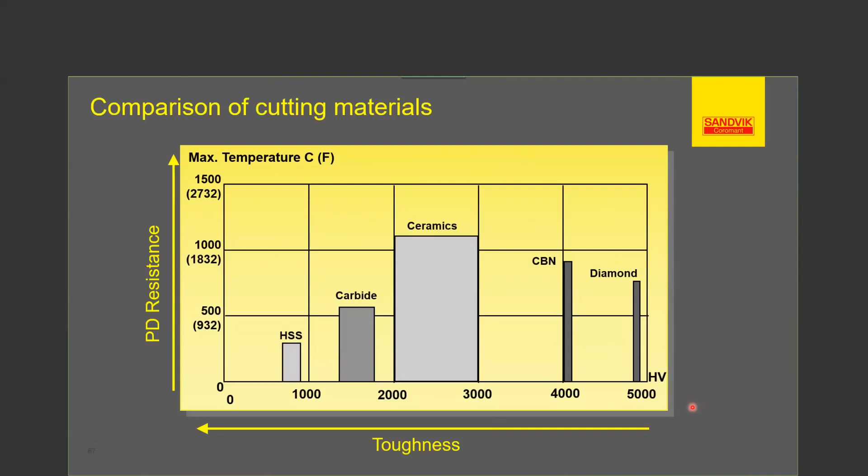Next, I want to talk a little bit about the exotic materials we see in the industry. Today I'm just going to touch on ceramics. There are others out there, CBN and PCD, which I will not cover today, but I want to touch briefly on ceramics. I do want to note right off the bat: do not use ceramics on titanium, you will get a fire you cannot put out. Be mindful, ceramics should only be used on nickel-based materials.

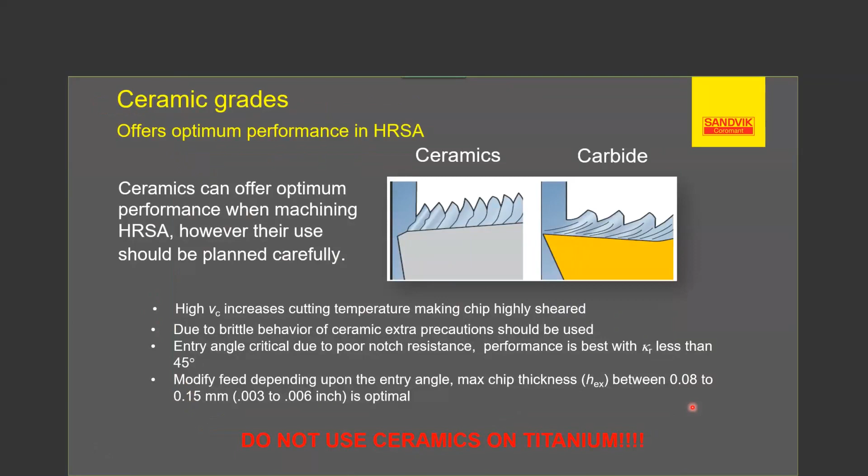Hey Bill, just a quick time check. We've got about 5 minutes left.

Okay, thank you sir. So these are a little bit different when it comes to the carbide - we can run at elevated temperatures. We're typically in these nickel materials running anywhere from 80 to 150 surface feet. In turning applications, we can run up to about 1200, a lot better predictability, a lot better productivity. When it comes to milling operations, we can run in excess of over 3000. We actually want to put these materials into a molten state to be able to machine them.

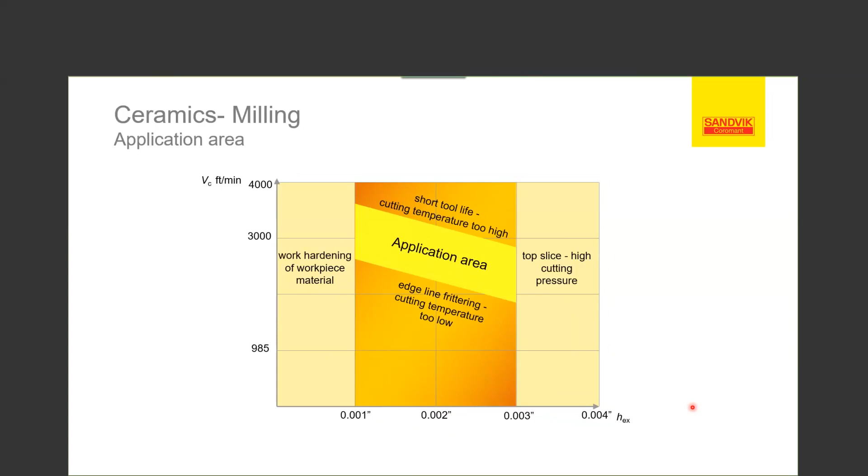Some of the toolwear we need to be mindful of when it comes to ceramics is a little bit different - we have a tendency of getting top slice. Top slice is typically due to overfeeding those inserts, creating tensile stresses on the top of the ceramics, which will essentially pop that off. So we want to be mindful of our feeds and actually reduce them, or go to a stronger whisker reinforced grade.

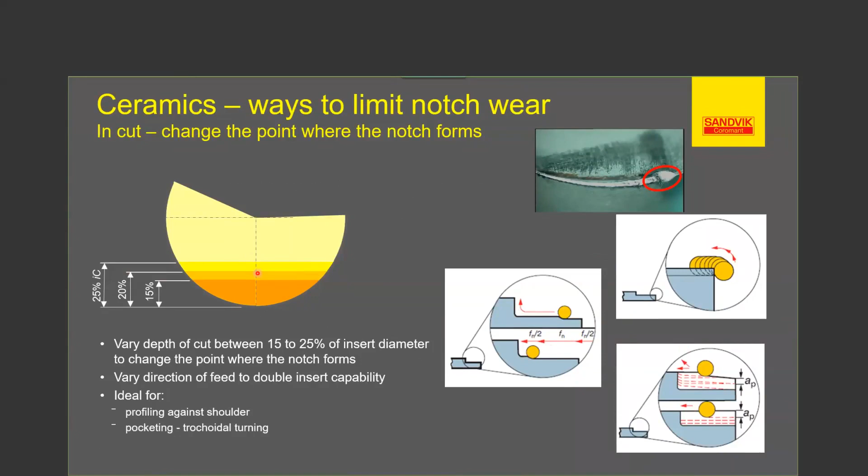Just like we talked about the different techniques to avoid notch wear in carbide, same goes for ceramics - those different radial engagements, reducing feeds, creating sweeps, changing depths of cuts on the inserts will all help with the notch in the ceramics.

When it comes to milling, one of the things we do not want to do is underfeed those inserts, or underspeed those inserts. We want to make sure we have a high elevated speed - again, we're trying to get these materials into a molten state, so it's almost like it's on fire to be able to remove those materials. If you create too low of a speed, you're not going to get good tool life and not good predictability.

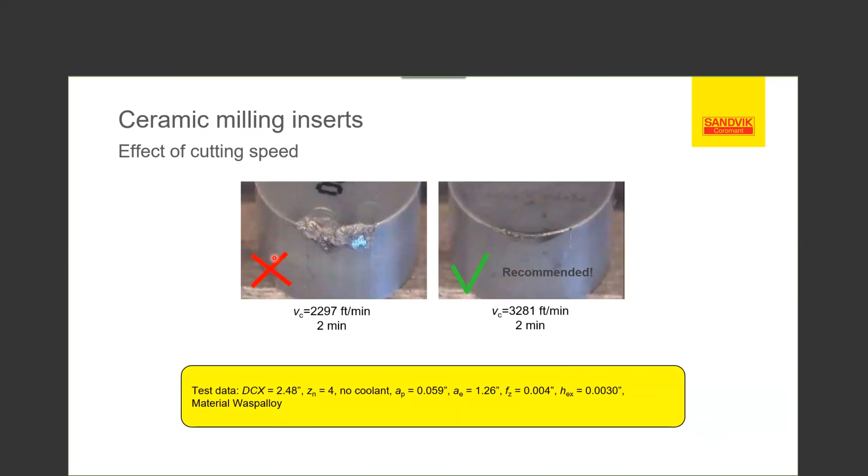The other challenge when it comes to ceramics is it does not like to go up against walls. So if we're creating features up against a wall, we want to use carbide first to clean it up, then go in with ceramics.

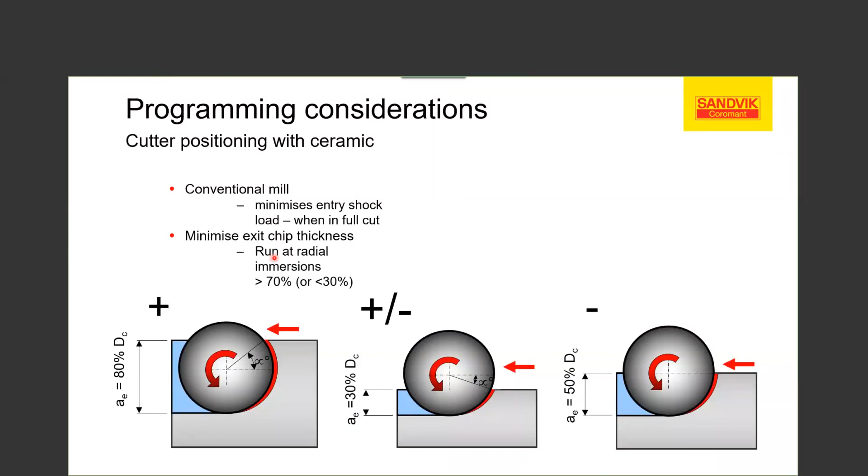The other thing is we talked about climb cutting when using carbide. When it comes to ceramics, we want to do just the opposite - we actually want to conventional mill. We want to build up that heat to create that plasticized state of the inserts. You can see here from the different examples, we're actually getting top slice because we're creating too much pressure on the left, as we are on the right we're getting nice even wear.

And again, when doing the roll-in technique, we want to do the opposite of what we did with carbide. Same as I said earlier, half the diameter cutter, and then add on whatever your offset is for the cutter.

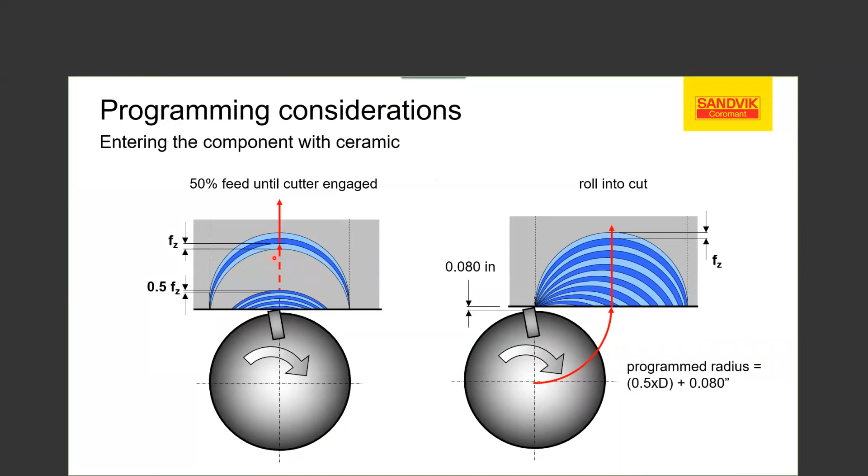The other thing is with coolant, we do not want to run coolant when it comes to ceramic milling. However, we do want to run it when it comes to turning. So milling dry when it comes to ceramics, turning wet when it comes to ceramics - very important.